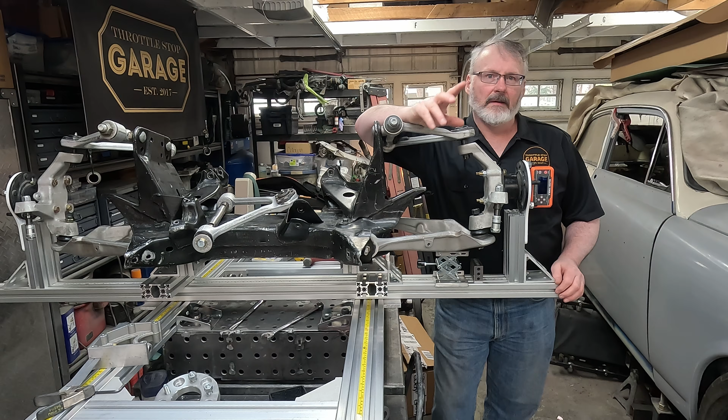So let's just jump in and we'll review what happened over here with this Corvette suspension. By way of a quick recap, this is the suspension I was trying to put in the car. It's out of an early C4 Corvette, so 1984 to 87.

Now, this Corvette suspension, originally when I purchased it, I didn't have the crossmember. I only just got the crossmember. This is how I found the problem. I had purchased another person's crossmember online, and that was like 10 or 11 years ago, which is a long time ago now. Maybe they fixed their problems. Who knows? I don't care.

At the end of the day, this suspension, I was having some issues with it once I got it installed in the car. So I built a frame. Again, have a look at previous videos. I built a frame, I put it in my car, I welded it into that car.

And then I just wanted to test it. So I decided I would test the kinematics of it in a static sense in the car. And then I discovered that everything wasn't working the way I hoped it was supposed to work. But I was trusting that somebody else was going to do my engineering for me. And that's really where we get. This is the road that happens to be paved to a very hot place. So we've got an issue.

Now, the original problem was, as I discovered as soon as I bought the crossmember, I wanted to validate the geometry here. I didn't want to take the other version of that, knowing I had an issue. I wanted to validate the geometry using the stock crossmember. Then I was going to shrink everything up on the fancy jig I built over here. And then I was meant to package this all up, chuck it under the car, and I was going to be done with this months ago.

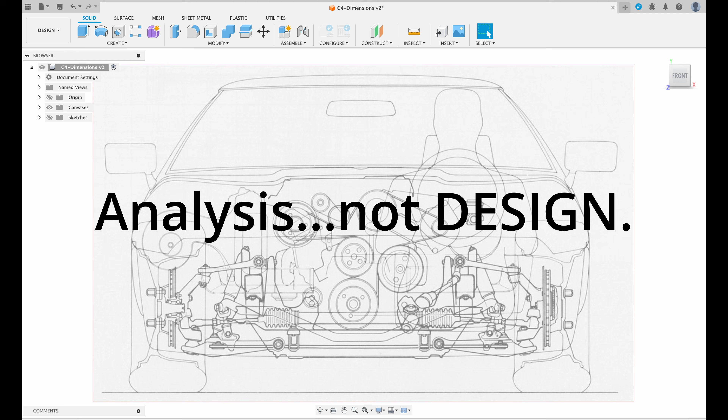All right, I think the easiest way to start the conversation is to just go over the way this is done normally. So let's look at the normal process. Here I've got a front model of the Corvette C4 that I've imported into Fusion, which is the CAD software I use. And in that software, we're going to begin by extracting all of the pickup points for the suspension.

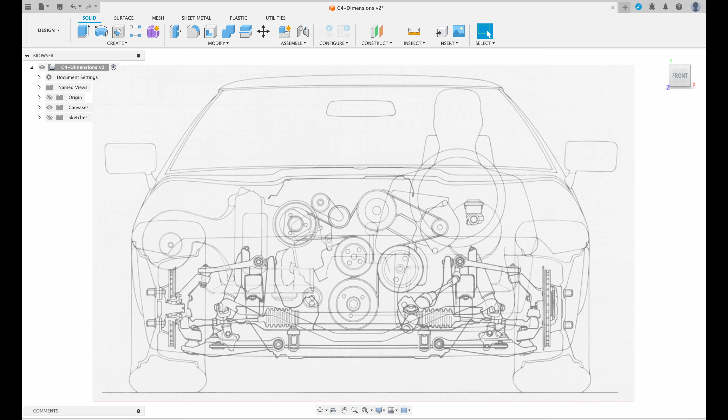Now, before anybody goes and comments about the upper control arm and the side view and all the rest of that stuff, don't worry. I've done all of that in reality because I do have the suspension to check.

Once you've pulled all the pickup points, you've got the track of the car, as you can see on the bottom, and you've got all of these bits of data. You can then switch over and go into a suspension analysis software. In this case, I'm just going to use a very simple online website, Racing Aspirations, no sponsorship involved.

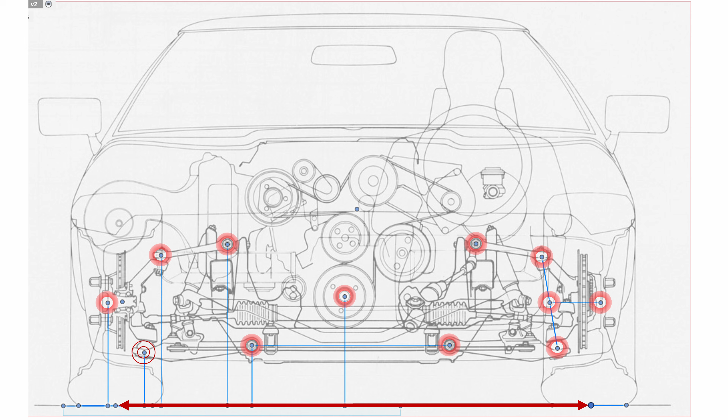I'll be using some other software that can perform the calculations in 3 dimensions and allow optimization and do other fancy things as we move along. So those points have been taken and imported into Racing Aspirations, and they instantly give us a few things if you pay them just a few dollars. It doesn't cost very much, really, quite economical.

They then will give you a roll center location. You have the ability to input the parameters by dragging points around in the interface, which I find a little clumsy. But if you're interested and you do have the data points, you can just type them into an editor, and in they go. Then you can start to understand how the suspension actually moves if you want to articulate it.

It's pretty good actually for doing things like simple roll analysis, so you can get most of the basics done right here. Now, this is what most people do: get your suspension, drop it into the calculator, figure out a roll center, make some very small modifications, and then figure out where you're going.

This isn't how we design things, but it is how we do a little bit of learning. Here I've highlighted that roll center, and you'll notice there's a tan area underneath it in a kind of triangle. That describes the space over which the roll center will migrate if you're moving the wheels. So if you move any one of the wheels up and down, or you roll the car in either direction, you'll notice the roll center will migrate within that triangle.

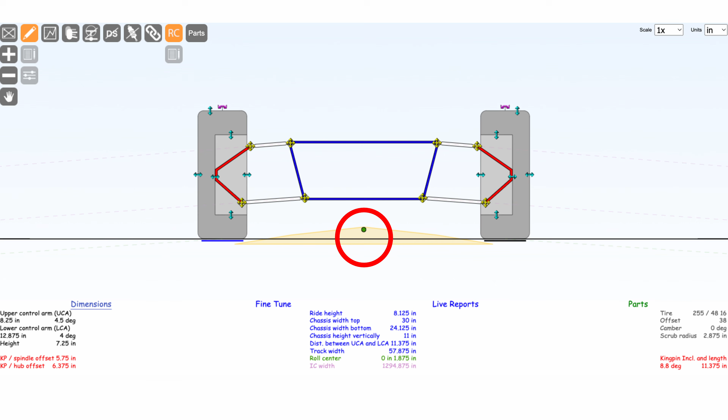In the Corvette C4 case, you'll notice that the triangle is asymmetrical, wider at the front than at the back, which means that as we go up into bump, it's going to migrate more than if we go into droop. And the space is pretty large over which that roll center will travel, which is also an undesirable property.

So base level analysis - when things go green in Racing Aspirations, you're good. You can also perform some basic roll. In this case, I'm applying a roll to the suspension, and you can get a plot, a graph of that particular motion and see what it does. I can then compare it to what happens in the garage, which is really nice. Let's have a look at what happens here in this roll.

In roll, you can see that we've got one tire, again, in the direction of the roll. The way the arrow in the middle is pointing, that's the tire that's going to be compressing, and the other one is going to be extending. I've just got the blue arrow showing you the direction of tire motion. So as you roll, one's basically going up, the other's coming down in order to stay in contact with the ground surface. That's important because through that motion, we can start to understand what's going on at the contact patch.

At the contact patch, you can see that as we've rolled, in this case, to the left, the contact that the tire is making with the ground is decreasing. The red arrows that have just popped up show that decrease in contact patch area. You'd like to maintain that as flat as possible as you're articulating your suspension. In this case, we're losing contact patch on both sides in roll, so this is going to be a sort of slippery situation.

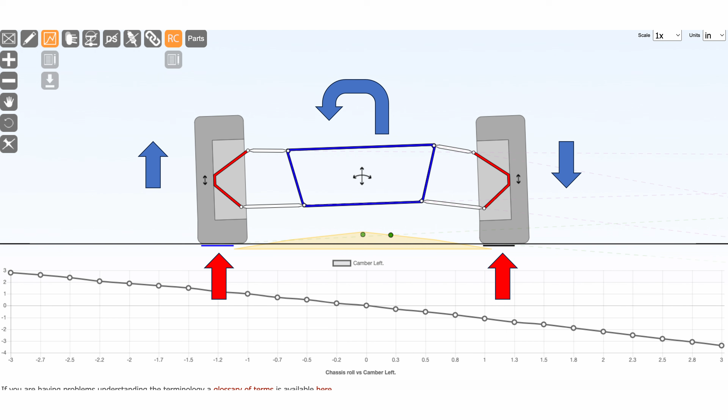You can also see the roll center migration - in that case, in the roll, it's just moving laterally to the right. And of course it wouldn't be any fun unless I could show you this in some sort of an animated way. So here I can show you a single wheel bump and how that roll center moves. I can grab that center and give it roll and then see how that contact patch is decreasing as we go. So a very useful tool.

All right, first and foremost, the most important thing to remember whenever you're doing suspension design is it's all about the tire. It's actually about the contact patch, which is an area about the size of your hand that sits on the ground, depending on the size of the tires. So we need to start here.

This is our first starting position. You need to absolutely know what the track is. That's center of the tire to center of the tire. And you need to know the outside to outside, and then I'm going to use the size of the tire I'm going to use in order to calculate the track, because this is just a tire I have lying around in the garage. I'm not actually putting a 245 on the front of this car.

So I'm going to get my tape measure out. I've got a tire on the other side. This has to be reasonably precise because we need to get all of this stuff stuffed up underneath the fender and still have a reasonable amount of room. So the car's set at ride height right now on the jig that's on the ground, and I've got the tire, again, just mocked up. It's the right height. All right, that's about it.

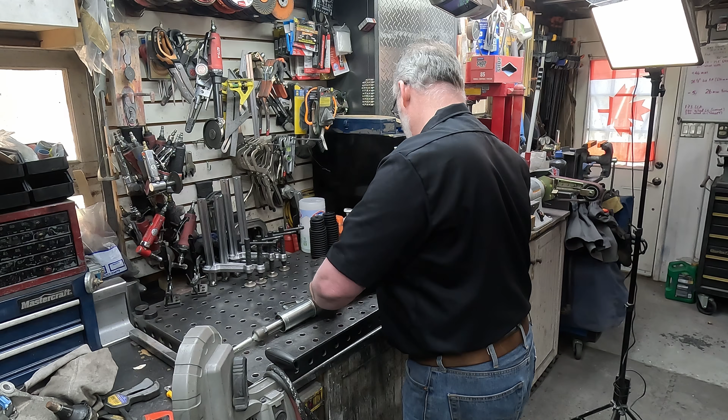So let's have a look. I mean, again, when I bought it, it came with boots. I've just pulled them off for this exercise. So let's have a look at getting these measured.

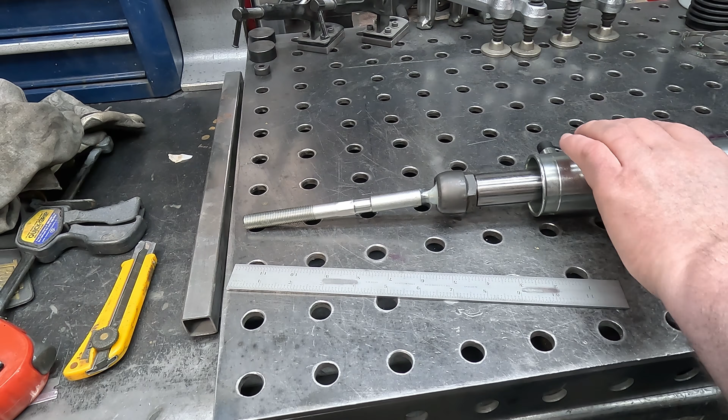So if you've never had to do this before, and I certainly haven't done it very often, all you do is figure out where the pivot is. There's a ball in here somewhere. I can take all this apart, but that starts to sound like work. You don't have to do that. Now, because it's brand new, it's pretty tight. I cant it all the way over to one side. It's as far over as it'll go.

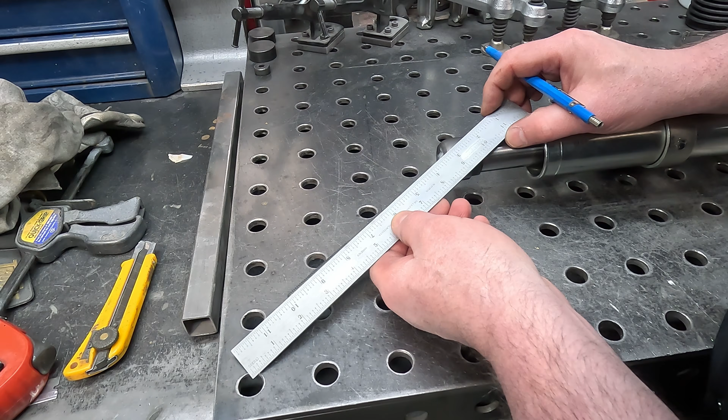And then I'm going to take my ruler. I'm going to put that ruler as straight as I can along this, and I'm going to try to hit the middle. Now I've got some features here that are helping. I've got a feature in here that's helping me sort of track middle. I'll get the right pencil out. And I'm just sighting it, like doing this by eye. Actually, it's more accurate than you think. It's about as accurate as it can be. So I'm looking along the threads, looking along the shaft, draw a line.

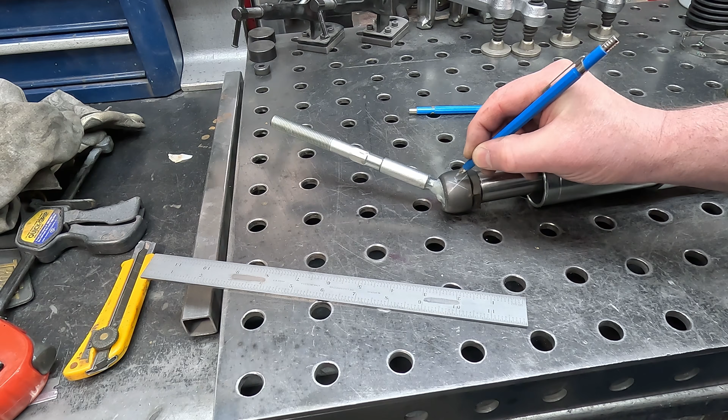Then I'm going to take it as carefully as I can. I'm going to shift that sucker all the way over to the other side, trying not to rotate it. Back to the same trick. And this is where that ball intersects, right there. Okay, I'm going to do this again on the other side, and then we're going to take a measurement.

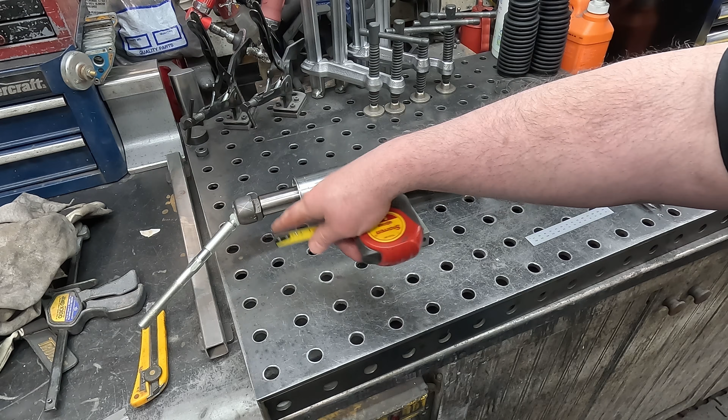Then the only way I can do this, because it's what I have, is I have to do this with this thing not flopping around on me. I have to do this with a tape measure. If you need to double check it, just double check it. So I erased my marks, I flipped it over, I'm double checking it.

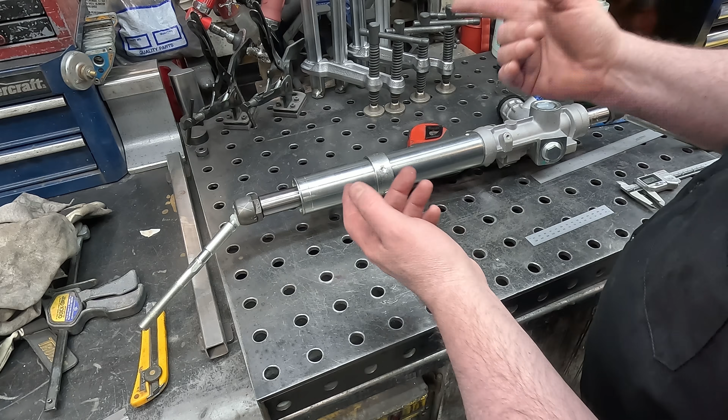This way is easier actually, because I don't have to deal with all of this junk. So I'm going to hold it there, tape there, and I'm out. I'm 615, okay? You got to write these numbers down, I use a book. So 615 millimeters is what you have for your steering rack pivots.

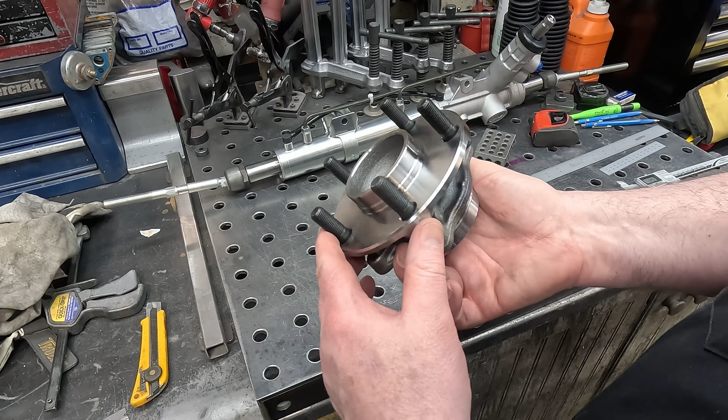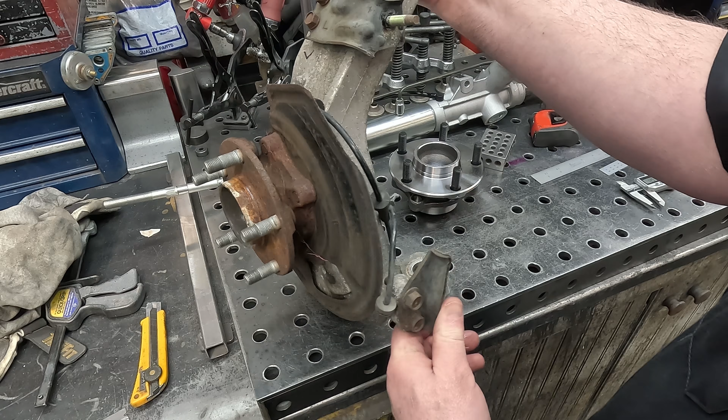Then take the measurements and put them all in the computer. Next, hubs. All right, I need a front hub. I wanted it to be modular, so I've selected a Nissan 350Z hub. This is the cheapest hub that I could buy. I also purchased a Nissan 350Z front upright because I wanted to know how things were oriented with respect to the bolt holes and everything else.

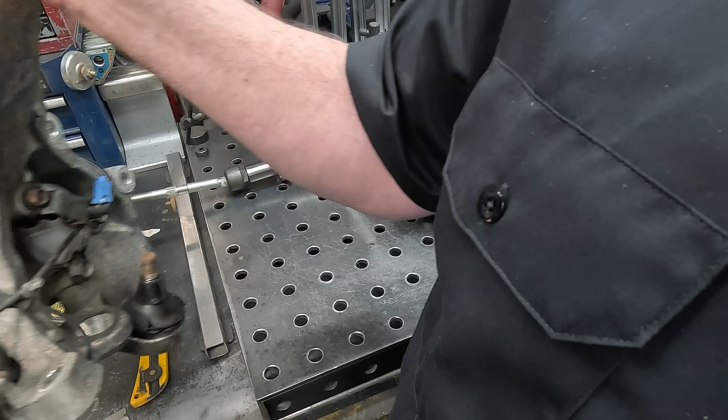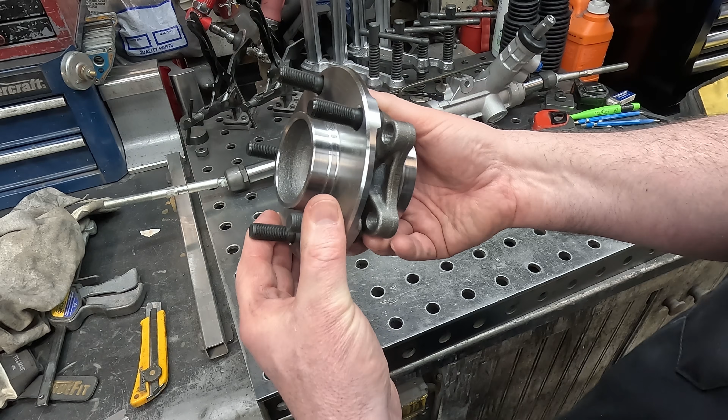So I bought that just on spec because I needed it, or at least I think it's a good idea to have it. So this isn't going to be a part that I'm using. I'm going to use the fancier SKF brand one. I just wanted to see what the difference was between a $30 one and a much more expensive one. It turns out there's some critical differences, a little thinner, just a little looser. Anyway, it's fine, so this will work for mock-up purposes. The other ones will be the real ones, but we're going to talk more about that in a sec.

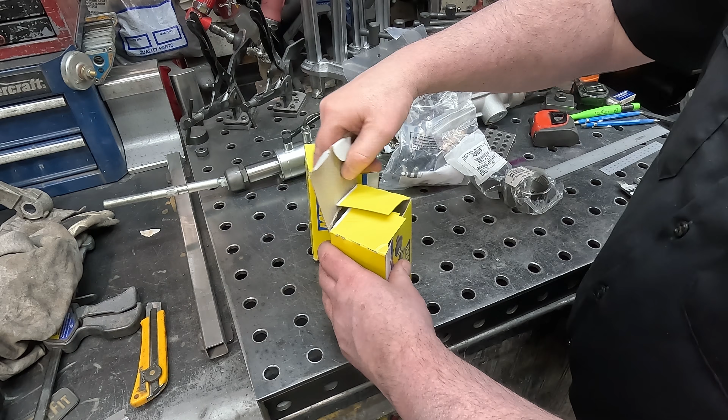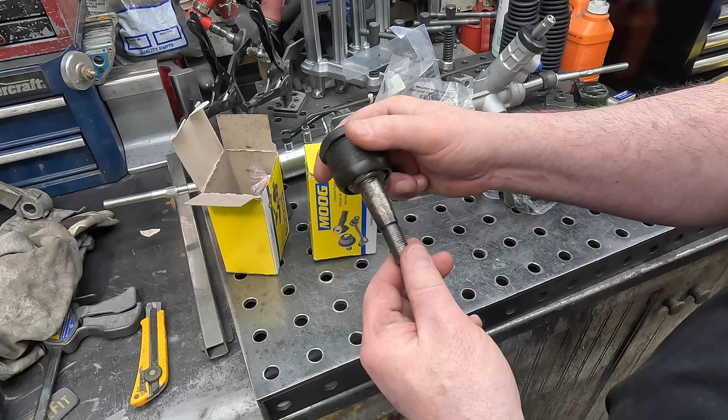The next thing are ball joints. I picked some standard products. I didn't want to take any chances here on buying things that are weird. So this is the standard screw-in ball joint. It actually came from, I think, 1950s Chrysler products, of all things. This is the Moog Problem Solver. You can find these almost anywhere, so they're easy to get a hold of. And then their screw-in,

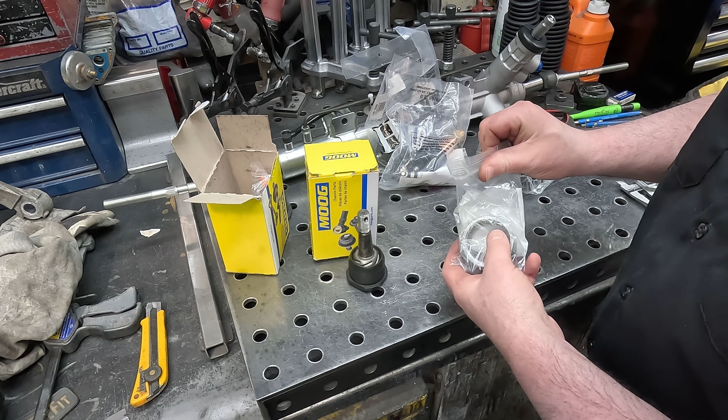they'll be more than adequate for this application. And they screw into a sleeve that I can buy off the shelf. So that's a good thing, we can screw them in, we can build arms around that. The problem with these, there's no problem with these really. You have to do that same trick to locate where the center of that ball is, because we need to know that spot. Now, I'm not going to use these parts. These, again, they're cheap, they're cheerful. If I ever ended up in the middle of nowhere and I needed a ball joint, I can get that ball joint. They're also used extensively in sort of NASCAR style racing stuff, short track and other things.

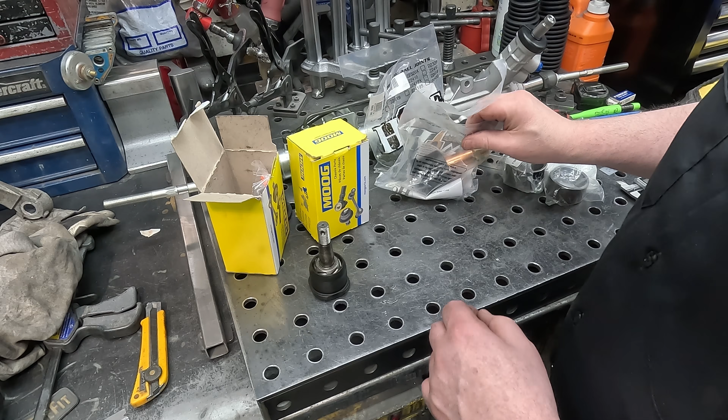These are the very much nicer versions of the same part. Just have the upper and lower, so I'll show you the same. So this is a Howe Racing. Again, nothing on these, but oh, that's nice. Okay, so that's the Howe Racing product. It's the same thing. I did buy the ones with the steel caps. They still screw in. This part and this part are in essence the same. The ball location is going to be ever so slightly different, so I'm going to engineer around the part I'm going to use. That part's just there for build purposes. You'll see why I bought that later.

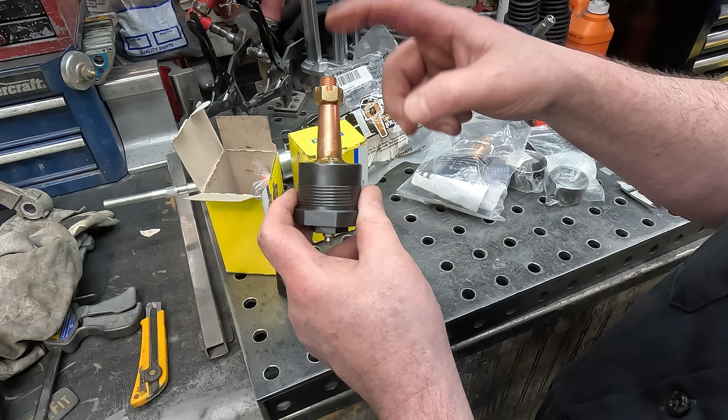Just notice the beauty of these ball joints. They're absolutely stunning. Now, these are for racing only, but they're fine on the street. I mean, seriously, just lubricate your ball joints, that's why you have a grease nipple. They don't have any of the sort of slots and other things that this has to carry grease around in them. So you do have to pay attention to them, but we all pay attention to our cars anyways, right? So this is no big deal. They're very low friction. I've never heard of anyone ever wearing out a cup. You can wear out the pin, but the pins are really tightly controlled dimensionally, and I have the drawings for those, and I do not even have to take these apart.

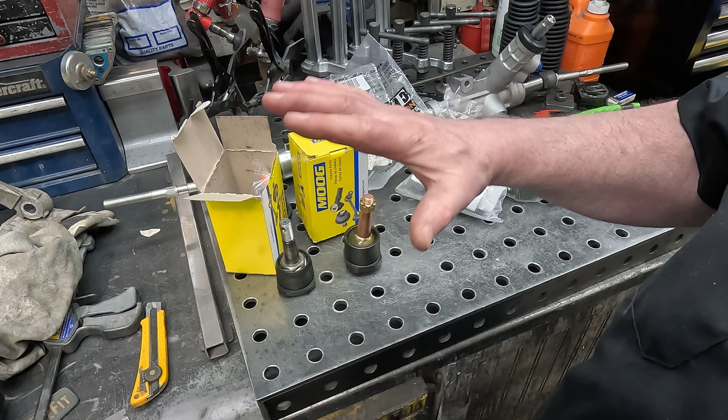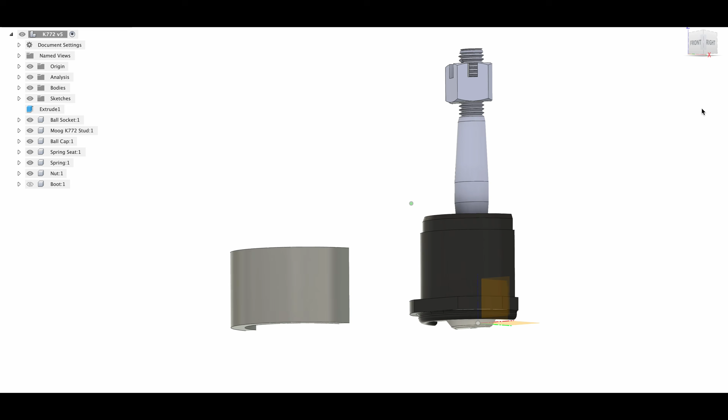They're perfect. So with all of these parts, the suspension now moves out of the shop and into the computer. I don't mind telling you, this takes me an awfully long time to do. Here I am back in Fusion. I've now got everything modeled, so you have to model every single part. So I've got the brake that I'm going to use, the mount for the brake, the hat for the brake rotor, here's the ball joint modeled. I literally modeled everything. It took, I don't know, like a long time, but now that I'm done that, we can move on.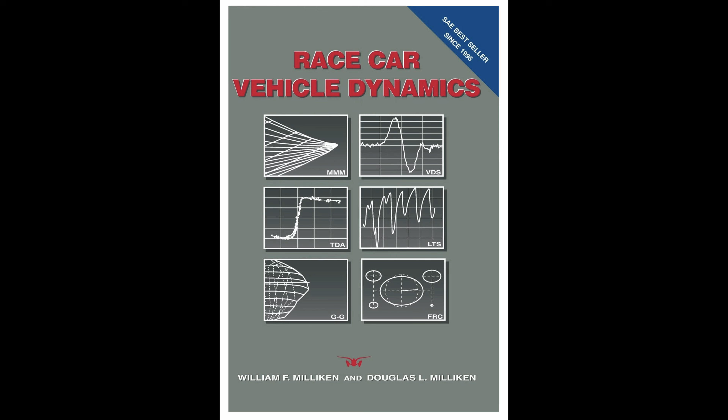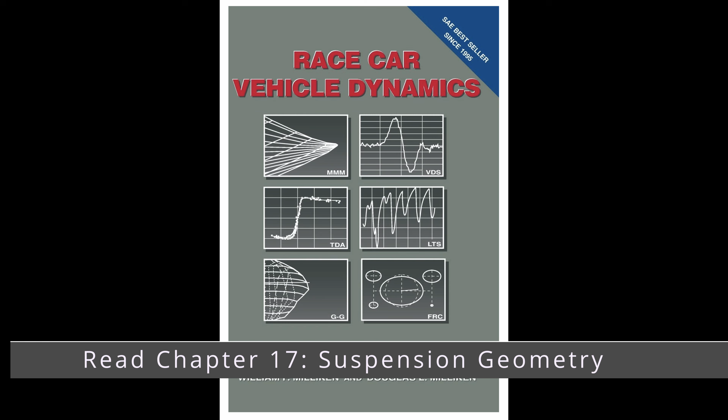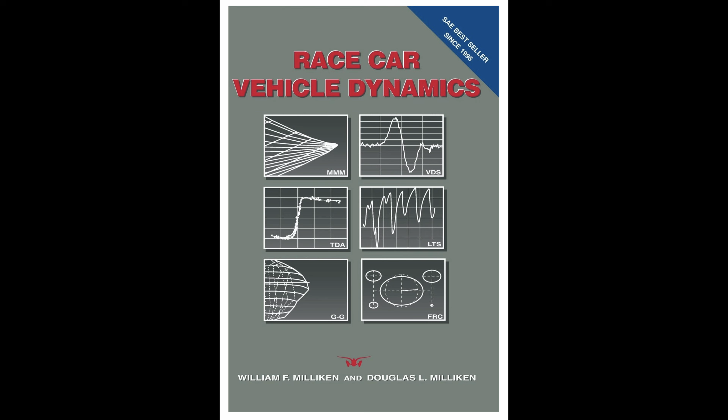Right off the bat, I gotta say a few things. First, you're going to have to read. You're going to have to get all the books, read all the books. You're probably going to come back to Race Car Vehicle Dynamics. This is the big Bible for the SAE and how to do race car dynamic things. But it's not necessarily a great read, so chapter 17 is really where you need to look into. That's the suspension geometry chapter, and that lays out most of this. What I found is a bit inconsistent and a bit difficult to follow is a lot of the suspension analysis that gets done is on pre-existing suspension geometry.

If you're designing your own suspension geometry, a lot of the former inputs become outputs. So I'm going to talk about that now.

We're going to start with the basic tire model. So we've got a tire here, a wheel, and I've put the wheel face in. Again, you're going to have to figure out offset. So we have a negative offset here.

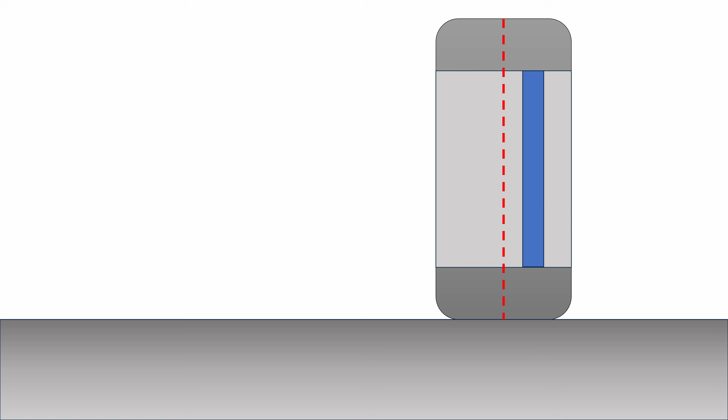We're going to start designing from this point. Now, the first reference point that you need - back in the garage we took the track of the vehicle, so we know the track. Once we've got the track set, the next thing we need to set is the scrub radius.

So that's step 2, scrub radius. Put the scrub radius in. If you don't put the scrub radius in, you'll chase your tail forever. The next question that always gets asked is how much - how much of these parameters is too much? Well, we know from that Corvette C4 that 74 millimeters is an awful lot of scrub, so we're going to lower that.

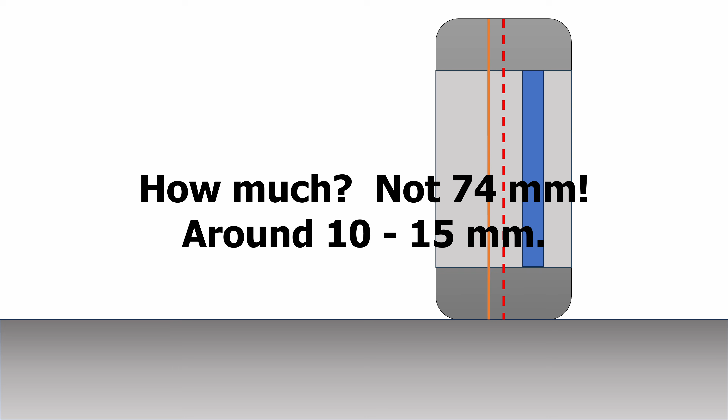As a viewer suggested, we're going to look at some cars that I can find the reported figures for. I found that most cars that are reasonably handling sports cars are between 10 and 15 millimeters of scrub. So I set 10 to 15 millimeters of scrub, and I decided hey, it's good enough for now. What I can tell you is if you don't set the scrub now, you can't hope to get it right later, because the scrub governs the next suspension parameter, which is the steering axis inclination.

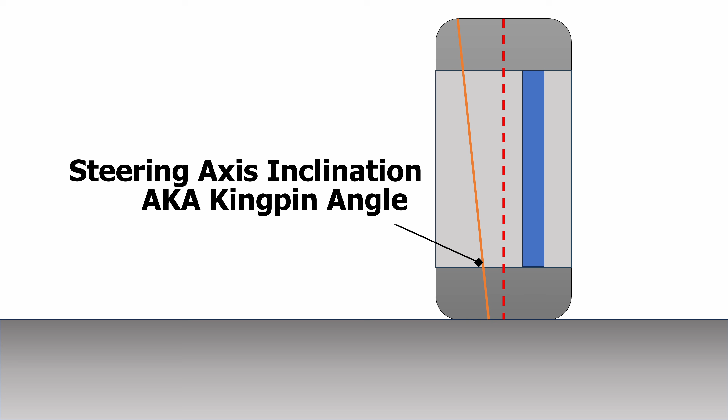Now, the reason you need the scrub first is the scrub defines where the steering axis inclination hits the ground. So that's just the steering axis and it's inclined. It tends to run around 10-ish degrees, so we're going to set it up at around 10 degrees. And if we don't do that first, I found it was just about impossible.

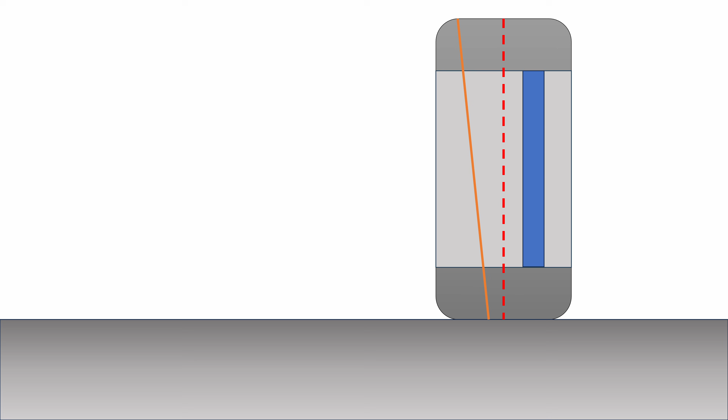Again, you're chasing your tail. So this is inputs becoming outputs. This is a needed input - you need to know what that steering axis inclination is. And you need the scrub because it describes that line that's sitting right there.

All right, so once you've got the steering axis inclination set, you need some points to define that line in reality, and those points are actually your ball joints. So your ball joints are going to set that steering axis inclination for you, and this is where you're going to encounter your first problem.

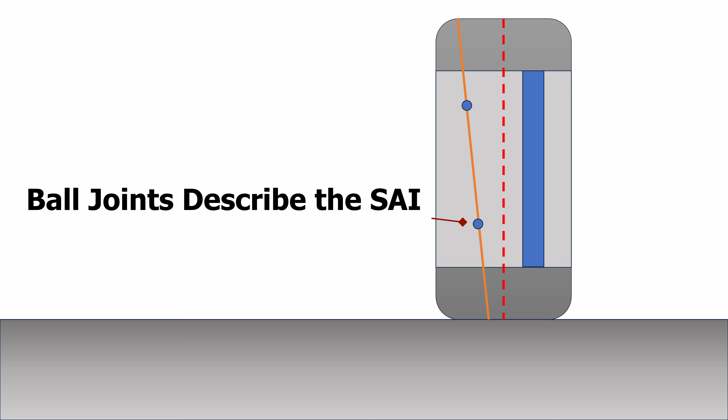Now that we've got the ball joints installed, in essence, we have to go back to the CAD model and check to make sure that we're going to be okay, especially the lower ball joint. You have to check that the lower ball joint isn't going to hit anything. At this point I haven't added in the rest of the junk that gets in the way in the wheel, so let's put that in now.

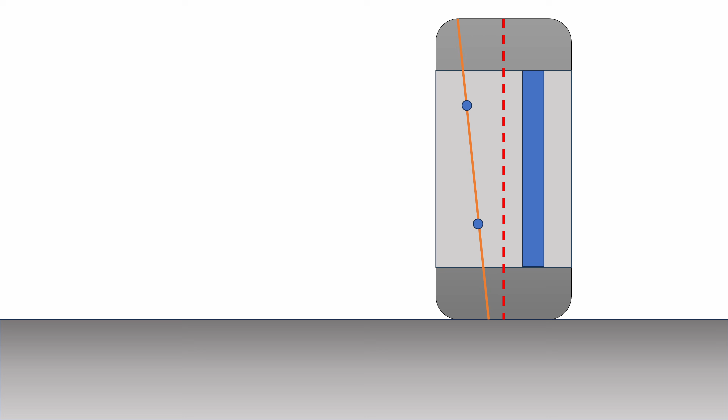So it's at this point that you're going to start to understand if you're going to be all right. This is why we had to go into the CAD model first to put all the brake hats, the hubs, the brake rotors and calipers, and every other thing in there, so that we can get some really simple measurements as we go back out to the suspension analysis software and start trying to place these points in space.

Okay, so in essence, as soon as you've got it rectified so that your lower ball joint and upper ball joint will not foul any of the parts - and that includes the size of their mounts - give yourself a finger's width worth of clearance, 10 millimeters all the way around would be nice. Then if you've got that established, and there is a place within the wheel where you can package this stuff, then you're pretty much set for the next step.

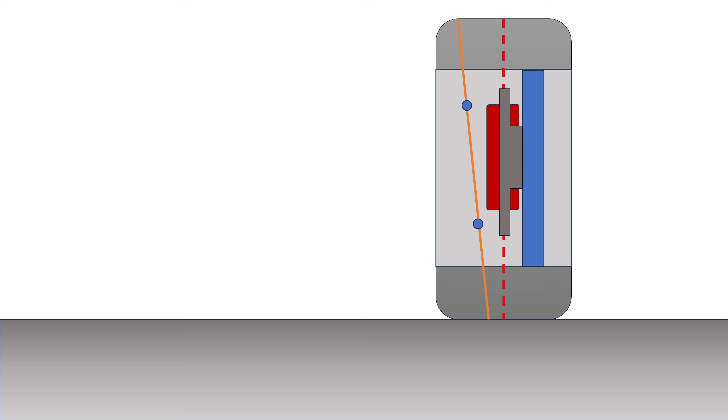Next up, we're going to add in the frame. So there I've added in the frame segment. And then we're just going to slide things around a little bit so we can see them better, but we need a center line and we need a few other things to make the model work.

So with the frame and the center line of the car in place, I can now establish where the center of gravity is. This is a rough approximation, but it's going to be close enough. Now, we don't desperately need a center of gravity here as we're designing, but it is helpful for when we go to do some of the other suspension parts that involve springs and other things. So we'd best at least get a first approximation of where it might be. I have some calculations that I did and I plunked it in. The next variable might surprise you.

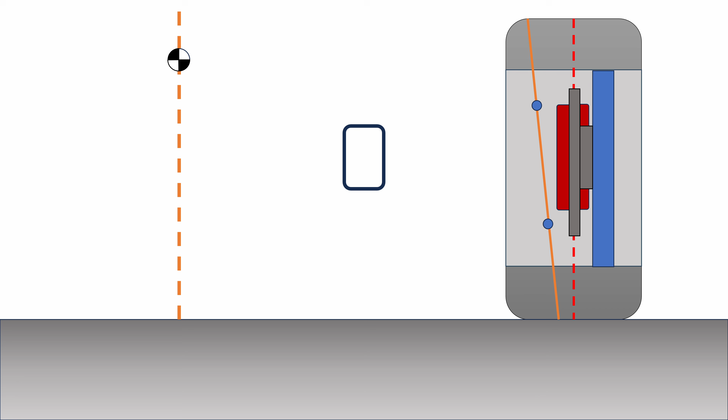Of all the points that confused me in the process of learning how to do this, roll center height was probably the first one, and it's the one where the dam broke. As soon as I learned that roll center height is an input, not an output, the rest of the suspension design is actually pretty straightforward, and I hate to admit it, but hey, that's why we're here.

So roll center height, if you're analyzing a suspension, it's an output. If you're designing a suspension, it has to be an input. If you don't have it as an input, again, you're just randomly doing things.

Now, once you've established a reasonable roll center, if you've got your center of gravity and your roll center height, you don't want those two things at the same point. There's jacking forces and all kinds of other things. Remember the reading that I said you had to do. You can set that roll center up.

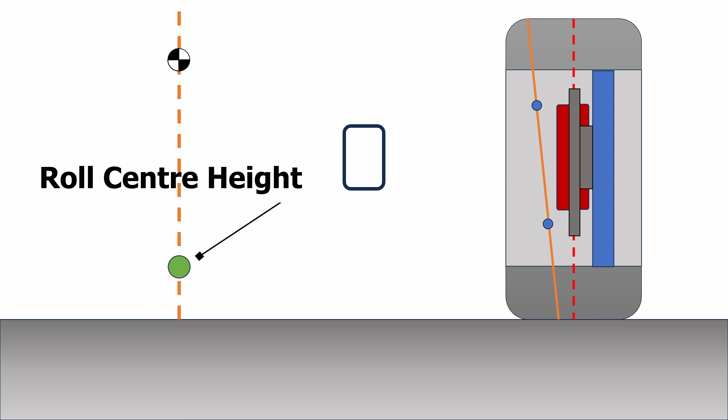So in this case, again, I went back and analyzed a bunch of other suspensions. I found somewhere around 60 millimeters seems to be a pretty good roll center height for a lot of cars. This establishes some real fundamentals, so if you have to change anything, you'll have to go all the way back to here. But 60 millimeters it is, let's carry on from there.

Well, the next question that has to get asked is, where are the instant centers? Once we have a line from the center of the contact patch through the roll center height, we now have the line upon which the instant centers must reside.

So for that static position, the only place that you can get all of those geometries to work is going to be with an instant center that passes through the roll center height and hits the contact patch at that point. Trust me, this is easier than it looks, and it's certainly easier than it is to explain. Perhaps this is why I've not seen it explained very well. Hopefully I'm doing a better job.

It takes 2 points to make a line, and the next point we have to add in to get this to work is the lower control arm pivot point that's inboard on the chassis. So you have to define that point. For the most part, the lower control arm does sit at the same height as the lower ball joint, so that pivot point can be placed there initially. If you need to move it around a little later, at least it gets you started.

Again, we're designing from zero here. So we've got a chassis, and I can put a point in there to have the lower control arm pivot on. So we're going to add that point in, and then keep going from there, because now we get to define another line.

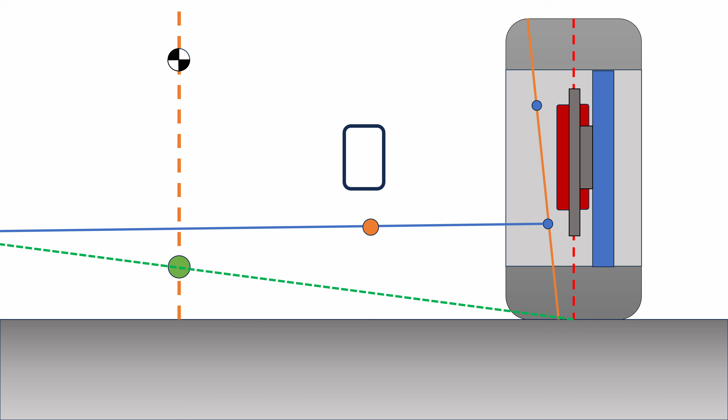You'll notice the intersection point for that line has fallen off our screen, so we're going to reset the drawing and then finish the construction from here.

All right, now the last thing you have to do is just go from that intersection point where the red dot is shown there, and you just draw a line right back up to the upper ball joint. In this case, it passes through the frame, but that's not really going to be a problem.

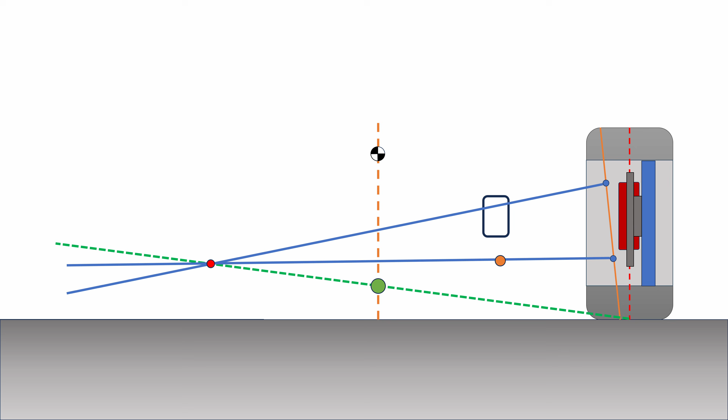Now, the one thing to remember here is this establishes the basic geometries. It doesn't control everything that we're going to have a look at, but it does control where things are positioned at a static ride height. Now, if you're still following along at this point, this took me a long time to figure out and to clarify it to the point where I think I can tell you how this works. So there's one last point to go, so just stick it out.

As we needed to define the lower control arm from ball joint to pivot in order to set up and find the instant center, now all we have to do once that line is described from the instant center back to the upper ball joint is place a position along that line that describes the length of the upper control arm. Now, this isn't rocket science, but it sure was for me.

After you get this done, you can now position the length of those upper and lower control arms anywhere you like along that line, anywhere, and the geometries will be the same. That's crazy, but it's also true.

Now that I've defined both the upper and the lower control arms, the last thing you need to know is the relative length of the upper control arm to the lower control arm. That controls the rate of camber gain for your suspension. So if you want more or less camber gain, you can change the relative ratio of those two arm lengths to get whatever camber gain you'd like.

As long as they're sitting on that line, everything else geometrically will remain the same. So the instant center will be the same, the roll center height will be the same, the scrub radius will be the same, all of those things will be the same. Then all you need is to say, what camber gain do I want?

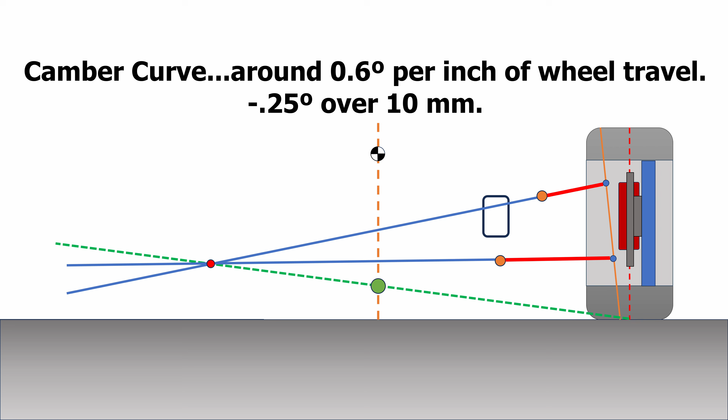Now, in this case, that has to do with relative body roll. I also have to match it to what I have in the rear end of the car. And actually, all the calculations, this is what came out. And as soon as I got that calculation done, then I set the ratio of the arms, so the upper control arm length to the lower control arm length, in order to achieve that rate.

All right, so this is the finished suspension. Yay, we finally got there. Well, finished - let's hold on there. We're not exactly finished this process. We're getting close. So this is what I've been doing.

So this is back in Fusion. I've got all the same principles that I've just illustrated for you, and I've doodled them up in Fusion. That's what I'm using to do this. I've got the frame member and all the other dimensions put in.

I've added in a few other lines, like you have to put in not just the point for the ball joints, but the size of that ball joint holder, or the cup that it mounts into. That has to be there. That's a constraint. And to be honest, I kept running into the brake rotor with it. So I've got all the parts listed.

You've seen the CAD drawings, so we've got those all spaced back. Then I've got all the points put in where I'm going to have minimally a quarter inch, so 6 mil worth of clearance. I was trying for 10, so I have both the hard stop and I have the clearance stop applied as lines.

And then I'm iterating back to Racing Aspirations just to do a simple 2D front view analysis of that suspension. And if I find that I don't have the parameters I want... so I went with about 12 degrees worth of steering axis inclination. I have about 16 millimeters worth of scrub. I have a roll center height of 60 millimeters in this model.

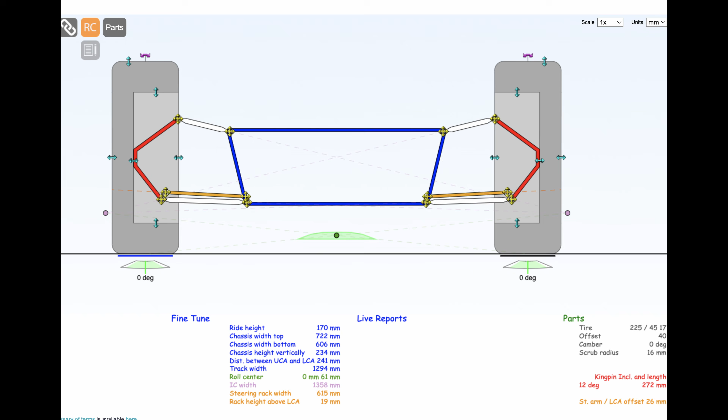And once I've got all those parts in, then I go back to the CAD model. I go back to Racing Aspirations, back and forth and back and forth and back and forth. I would also say that this is just my first cut. I still have to do the side view, as I've just said, but I also will have to optimize this, and this simple online software is not going to be enough to do that properly.

So we'll be breaking that out, getting the side view done, putting into a 3-dimensional analysis software, and then looking for some optimization for this. So it's not perfect just yet, but it is pretty good.

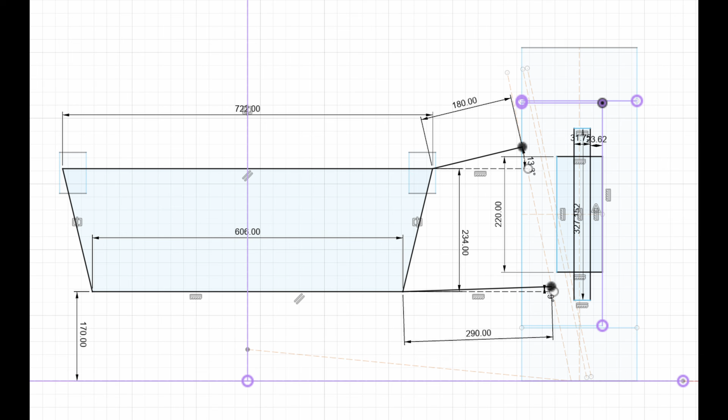Okay, that's a wrap for the front view suspension design. It's been a heck of a long time to get that done. Sorry for that. I go as fast as I can, but by the time I had to figure it out, I did have to wait for it to sort of come very clear in my mind before I could actually get the design finalized. I did spend weeks just going in circles, not too sure what to do, not too sure where to start.

So I hope that this video has been some help in providing a little bit of insight into how we get the front view defined if we're designing a suspension. We're going to now turn to the side view for the next video, and we'll start building this.